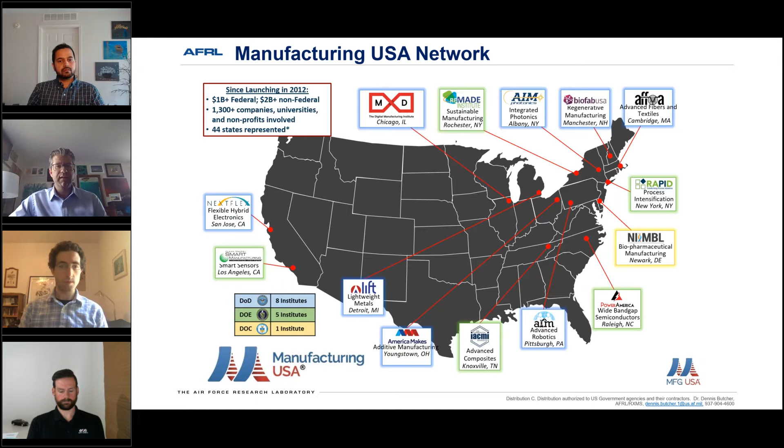We are located in Youngstown, Ohio. We're one of 14, and soon to be 16, Manufacturing USA institutes. There's a network, and hopefully most folks on the phone are familiar with this. These other institutes have penetration across other technology topics, each one set up to focus on an area of advanced manufacturing technology. We're the first, and what we like to consider the flagship institute, having been established in 2012. We're going into our 8th year of activity executing against that mission.

One of the big things we've focused on from the beginning is making sure we're listening to our community, making sure what we're focused on is what the interests of our stakeholders are. Thinking back to that convening and coordinating function, it's really about bringing the community together to talk through and understand, and then build a plan on how we execute, how we put something in place so that we're better positioned as we move forward.

In talking to our stakeholders, we regularly pulse them, whether it's from a technology point of view or a community building point of view, on what are the areas and reasons that they engage with the Institute and why they work with us.

We have a very large portfolio of R&D projects, happy to talk to anyone about that at some other time. We've got a couple hundred million dollars of additive-specific work that's gone on or is going on right now at the Institute. So being a collaborative partner, we really look to get that information shared, get it in the hands of the community so we're able to best take advantage of it, while making sure we're understanding.

We have a couple great speakers here with us that represent the OEM side of things, constantly pushing the limit of what additive is doing today, looking forward to what it can be doing tomorrow, and making sure we're getting our membership access to this information and sharing it the best we can. So this is transitioning now to what does this all mean.

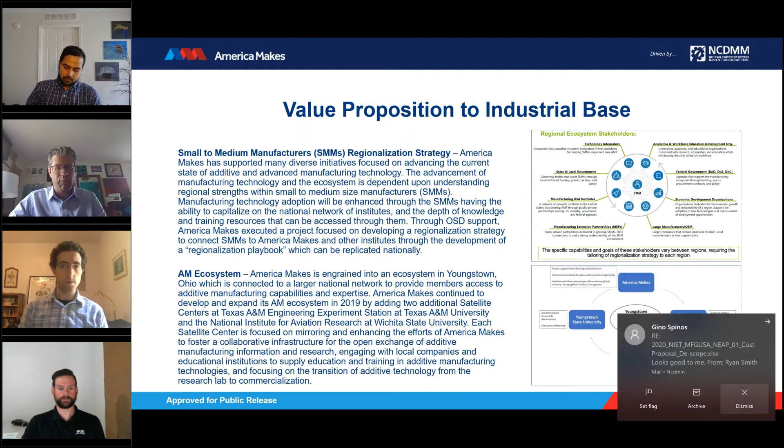As we first started talking through what we should do as an institute, we certainly knew our share of additive manufacturing and had some ideas on how it could help. We weren't completely clear on what our role was until we started to reach out and talk to our member community. Call after call, it was manufacturers who were either stepping up or trying to step up in some way, but in most cases they didn't understand what the next right thing to do was.

So we collected a lot of that information, and we decided it wasn't acceptable to not understand where to go and what to do next in regards to this very specific crisis. We put together a document, submitted it to FDA one weekend back in March, and called out very clear and distinct problems that we had heard from our member community. This is the kind of convening function of what we do, and we put it in front of them.

It was immediately met with a response from the FDA. The next day we were teamed up. Part of what we had proposed was bringing an interagency group together, with us as a public-private partner to bridge to the community on the industry side. We need to get focused.

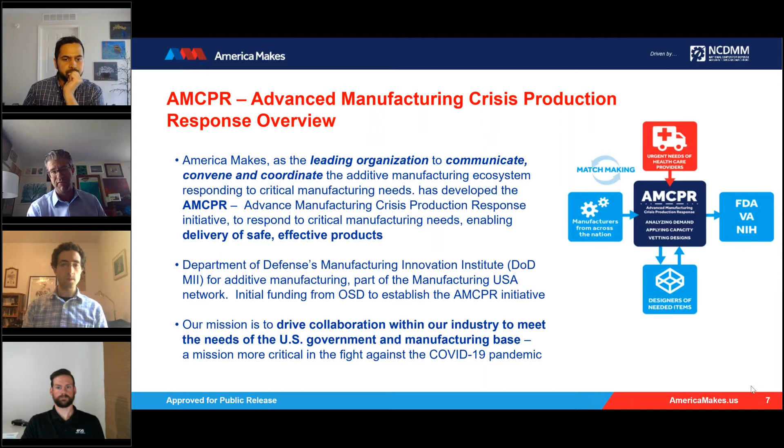So whether you're a manufacturer, a designer, or someone who needs a product, you needed an outlet and a place to go. Really the power behind this was bringing that interagency group together. I won't pretend it was all us by any means, but we've been working day in and day out with that community to drive against one central mission: the delivery of safe and effective products. We wanted to make sure we were bringing folks together around designs that had been reviewed.

A lot of enthusiasm doesn't necessarily help, that can be good and it can be bad. If people rush out and end up doing the wrong things, or worse, ultimately harming somebody, nobody wants that. With the lack of information out there, I won't suggest people were harming anybody, but there was the potential, with lack of clarity, in who should be working on what.

We put together this AMCPR portal, and that has been connected directly to the NIH 3D Print Exchange. We had worked with them over the years, and we built a portal like that exchange for the DoD to be used internally by the Department of Defense.

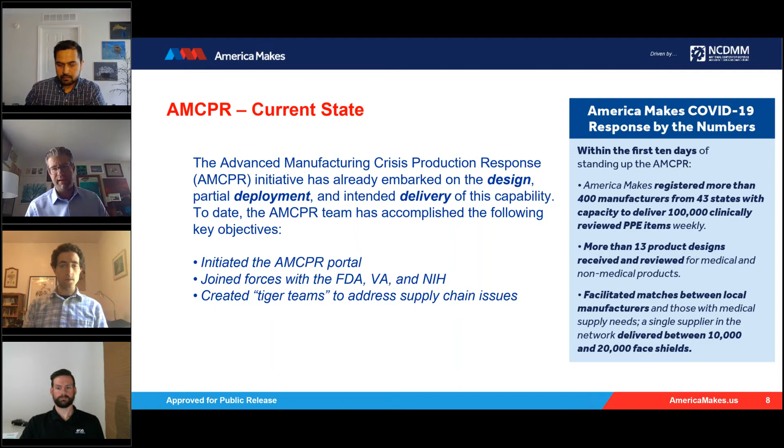So our response has been centrally focused on building this portal, connecting with this interagency group, and trying ultimately to demystify things. We've come up with all kinds of cute names for the different tools, like Decoder Ring and Rosetta Stone. But we've put teams of people in place to help the general manufacturing community better understand what they should be working on and where they fit in, and truly understand what those rules of engagement are, and appropriate barriers to entry and how to overcome those.

How do we get to the point where designs are trusted? It goes through a preliminary evaluation with the VA. This is certainly not the only path, but it is one that has proven quite valuable. They've tested literally hundreds of designs at this point. Dozens have actually made it to the point where they're in the category of community use or approved for clinical use. And the FDA has been involved, again from day one, helping with guidance, clarification, and general communication with us. It's really worked out well.

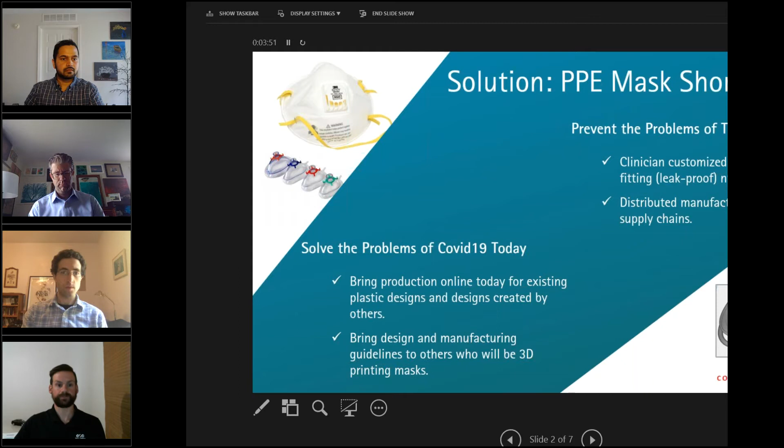The second key aspect that we really looked at, aside from the PPE, were the ventilators. I think it's been pretty well covered in the news that both Ford and GM put a lot of energy into the ventilators, and 3D printing was actually featured in some of the press videos released around.

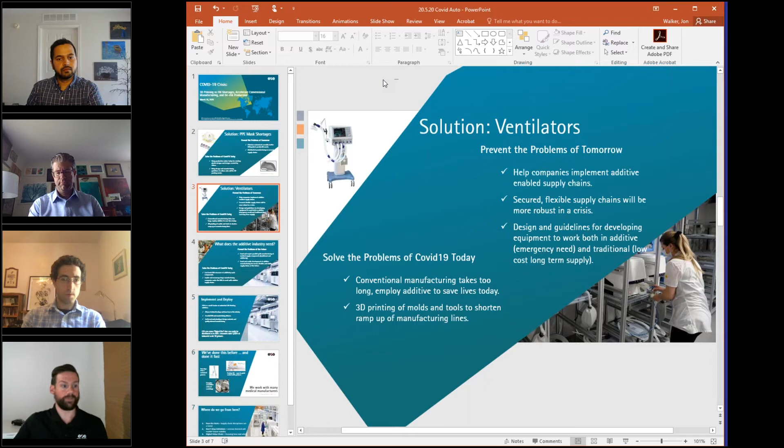So if we look at a couple of the challenges we just presented in the ventilator scenario, the trick is figuring out what we need to do differently moving forward, so that if this type of scenario arises again, we can better prepare for it.

Short-term, FDA actually did a really good job of fast-tracking a lot of approvals. Any devices related to COVID presented to the FDA were fast-tracked, which enabled a lot of parts to get online more quickly than typical. But looking at preventative measures so we can respond faster in the future, the concept of parallel path qualification comes in.

This is actually a really key concept we could think about with the automotive industry as well. If you're a medical device company, each product released into the market needs FDA certification to be sold, and that certification can be very time consuming and expensive. But if you were to qualify 2 different similar devices at once, it would be significantly less expensive than doing these 2 similar devices at 2 different times.

So one of the thoughts as we think about enabling extremely flexible supply chains is to qualify the 3D printed components at the same time as the traditionally manufactured components. Then you would have 2 sources qualified.

As supply chain interruptions pop up for any reason in the future—could be as simple as a supplier gets flooded or something like that—maybe one component isn't done. If you had a sub-assembly or an individual component qualified with 3D printing, you could look to outsource that piece to a 3D printing supplier, and a service provider or manufacturing partner could give you the 3D printed parts as a bridge.

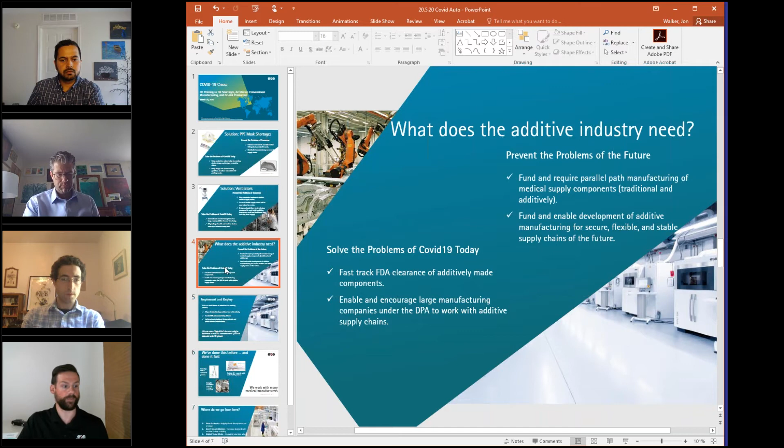So specifically, why was EOS able to help with a lot of these challenges?

There's some really cool stuff coming with the earlier example I showed with the PPE around facial scanning, reusable N95 masks that are safer, lighter fitting is something we hope the medical industry can do moving forward. So we're very close to announcing that, and the partnership we worked on with the hospital and the software company. So that's something we can look for.

But a few of the reasons EOS has been able to really help a lot with the COVID situation is that we have 30 years of industry knowledge. EOS is one of the original pioneers of 3D printing, if you're not familiar with us, and we celebrated our 30th year in business last year, so actually 31.

Between Laura and our existing dedicated medical staff throughout EOS, we have people in our consulting team and business development with specific medical experience. We're very good at knowing the unique requirements of the medical industry, and also have experience helping customers get parts qualified, which really makes us very agile in moments like this, because it's not our first rodeo.

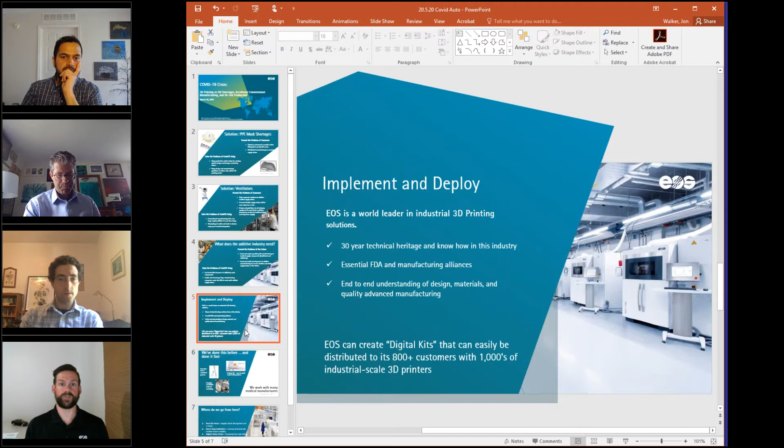And then as well, EOS has more industrial grade machines in the field than anybody else. So when it comes to some of those challenges around ramping up a distributed manufacturing supply chain, we will have the most contacts, and because we have the most systems in the field, there's going to be the most capacity for a given machine model or a given material.

Everybody has a different size nose, cheek, mouth, etc. All these shapes that come together to form your parts are different as well. And that's where we feel that scan to print around PPE could be such a key technology, because if you could minimize the gaps around the nose and the chin and on the cheeks as people talk, you're going to minimize the negative space there that germs could fly into. So we think that's a really key technology.

And if you could imagine dual qualifying a traditional ventilator used with injection molding and die casting and a 3D printed ventilator, if the 3D printed ventilator had 2 components for every 30, and we look at using 3D printing as a bridge technology, it would really, really efficiently help people get up and running when they need to get this spot on demand production.

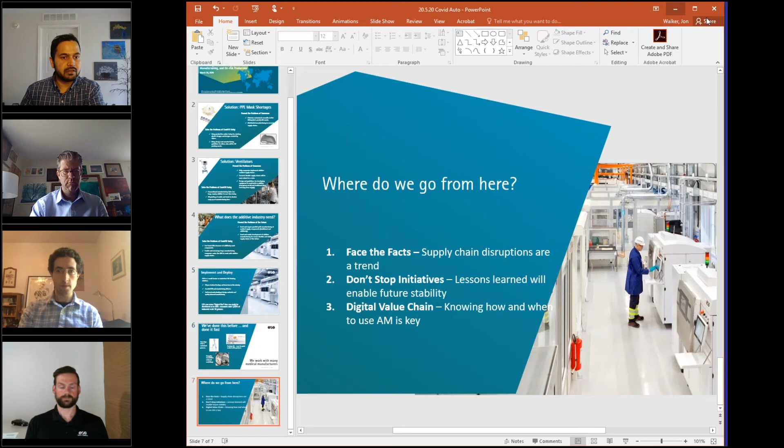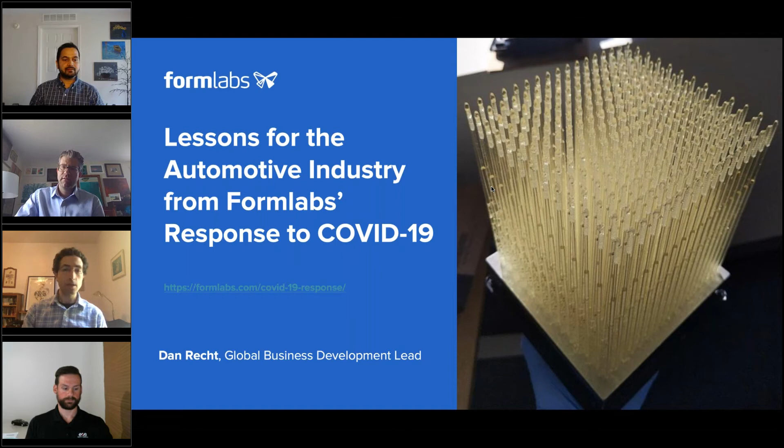Thanks also to the Johns for great presentations before mine. I represent Formlabs, and I'd love to talk about how our response to COVID-19 played out, and I think there are some really clear lessons for the automotive industry from that. I'll cover 3 topics: I'll introduce us as a company, go through our response to COVID-19, and then try to distill some lessons for the automotive industry from that.

The key thing to understand about Formlabs is our mission. We're a company about expanding access to digital fabrication so anyone can make anything. Practically, that can mean an individual engineer or designer doing their prototyping, but it can also mean a factory switching over to additive manufacturing, a dentist making dentures using our printers, or a hospital making medical devices. What we're really trying to do is push the boundaries of what's possible with additive manufacturing in every way we can.

We were founded in 2011, 2012, out of the MIT Media Lab, and started with a Kickstarter for the Form 1, the first desktop stereolithography 3D printer. Stereolithography is a process where a liquid resin is solidified in response to a beam of light—that's how the 3D printed part is made. We've progressed from the Form 1 to our current generation, the Form 3 and 3L, which are our engineering printers, and the Form 3B, our dedicated medical and dental printer.

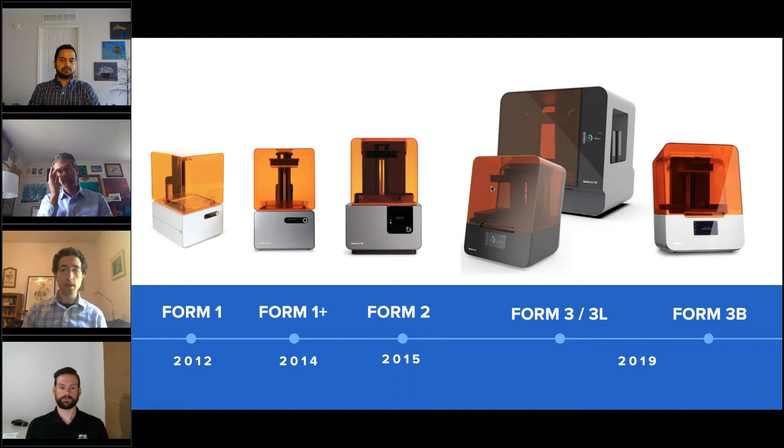We've had a huge impact in terms of the number of printers in the field. We have 60,000 printers out at customers, and our customers have used those printers to print more than 50 million parts. As we've grown from 2012, from a 5-person company to now a more than 500-person company with more than 100 million in revenue, we've seen the scope of what's possible with additive manufacturing grow and grow, and we've been excited to be pushing that forward.

Our vision has really crystallized around the idea of an agile future for digital manufacturing. What I mean specifically is that our machines, which are desktop sized but as capable as large-scale industrial machines, let you do things with additive manufacturing that weren't possible even with previous generations of 3D printers.

Specifically, it's just like the transition from mainframes to blade servers for folks in IT—the idea of one big unit being replaced by many identical mass-produced units. You get a lot of benefits from that: benefits in redundancy, benefits in scalability, you become more flexible. It's possible to have leaner processes and facilities. And these mass-produced units, because of their smaller form factor, if designed well, can be much easier and more convenient to use. Rather than just talk through this now, I'd like to show how this played out with our own response to COVID.

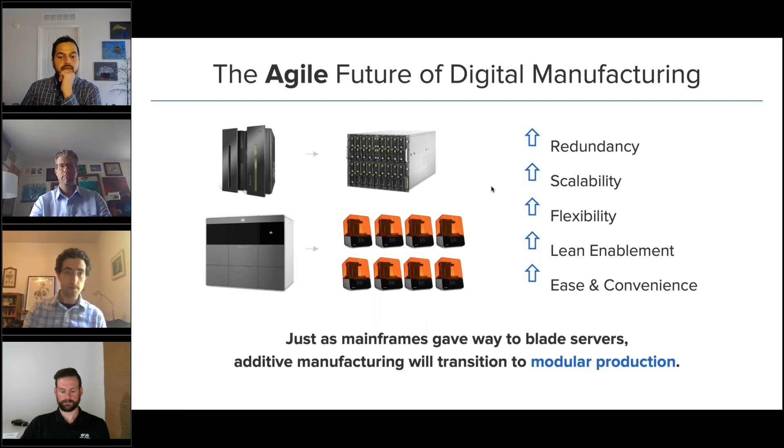A little context: we operate a facility in Ohio that has two purposes. One, it's our chemical plant where we make all of our resin materials, but it's also the place where we produce the free samples that customers or potential customers can request on our website. In a typical week, including in March, this facility was producing 5,000 samples per week, using 250 printers and 11 full-time employees.

We were in a unique position as the COVID-19 crisis began to unfold because we are already a medical device company. I mentioned we had a dedicated medical and dental printer, the Form 3B—B is for biocompatible. And our Ohio facility, as I said, is where we produce all of our resin materials. Some of those resin materials were already specifically for medical devices and had indications that were registered with the FDA.

As a result, we were able to transform relatively quickly from a sample making facility to a facility that was producing medical devices. It helped also that we already had ISO 13485 certification. For you automotive folks who might not be familiar with that one, it's the same as ISO 9001, a quality management system, but specifically for medical device production.

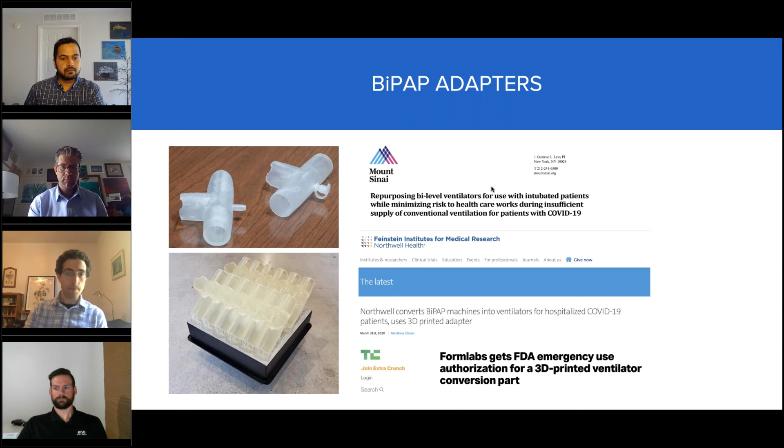In addition to our medical device efforts, we've also created a COVID community library. You can think of this as related to the NIH part library, but specifically geared towards Formlabs printers. The reason for this is because we knew we had so many printers in the field and so many owners of our printers volunteering to do something. We wanted those people who were not medical device producers to be able to make something useful with as little overhead as possible.

So as I mentioned, we put out a call for volunteers. We had over 3,000 people and organizations volunteer to use their Formlabs 3D printers to help out in this crisis.

We produced a curated part library in partnership with Bellus3D, a scanning company, the Yale School of Medicine, Materialise, and other members of our community, and posted it on our website. For any of these parts, someone with a Formlabs printer just has to download the file from our website, and it immediately goes to the printer. There's no post-processing or setup needed—it's fully set up to print. So you can think of it as one stage of additional processing from the NIH website.

We've also been working on contributing various parts and design improvements to the NIH website, and have been working with America Makes through this process.